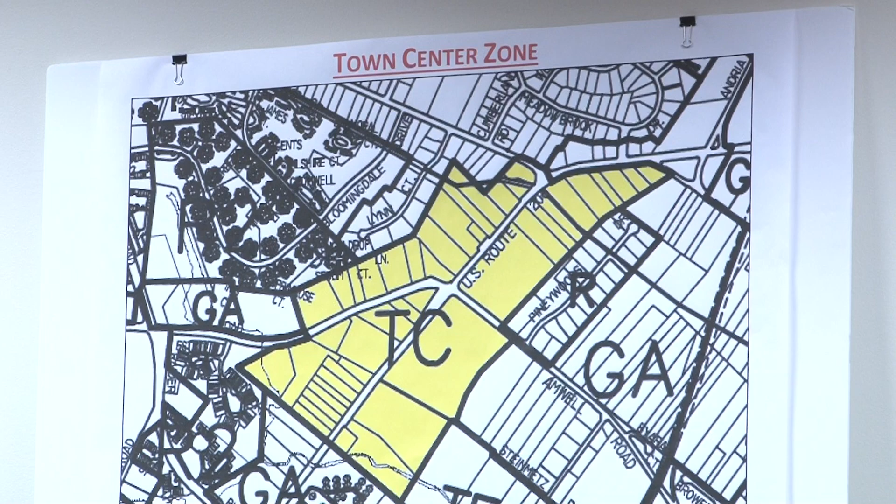Simply put, the ordinance would add single-use multifamily dwelling buildings to the permitted uses and conditional uses in the Town Center District. Apartments are permitted uses right now in the zone. This does not add a new use. It's just that they are only permitted on the upper floors of mixed-use buildings. This would allow them to be constructed as part of a mixed-use development, but in a single-use building.

So the thing to remember here is that you would not be getting an apartment complex type development with no retail. It would still have to be part of a mixed-use development. There's two main components to the ordinance. The first adds a single-use multifamily building as a permitted conditional use in existing shopping centers as defined in the Town Center District.

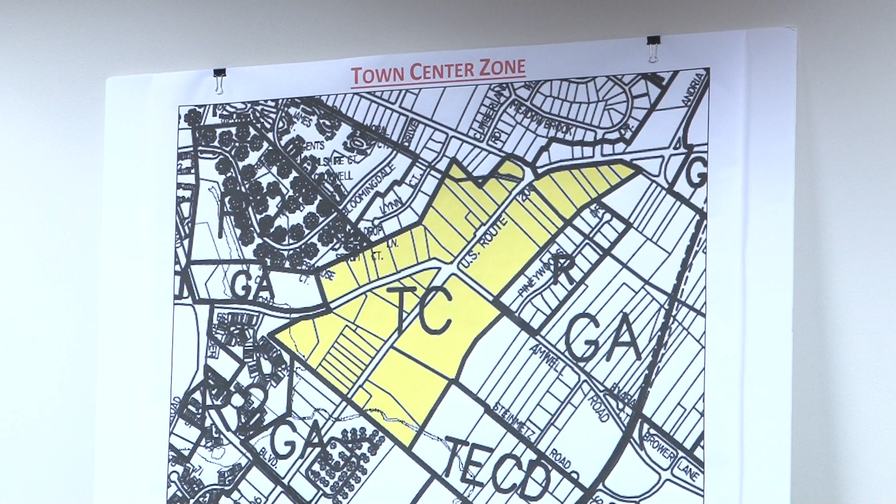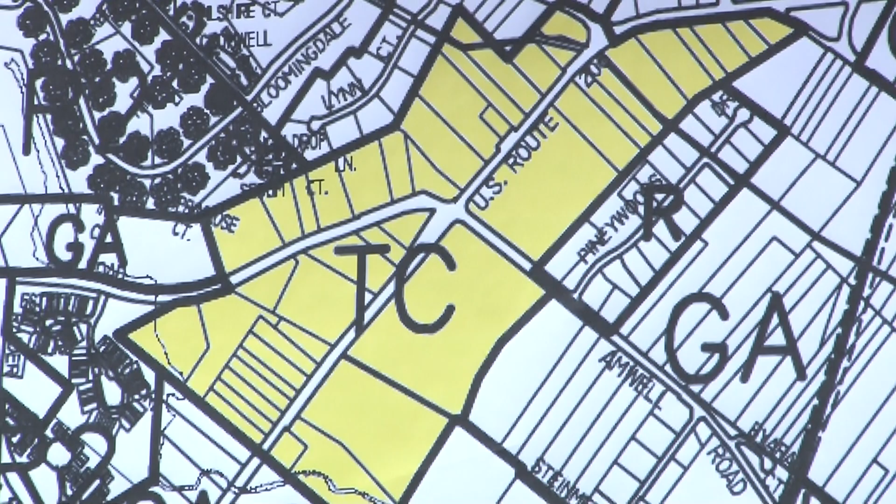They would apply to, in this case, the two existing shopping centers south of Amwell Road and east of 206. Pointing at Nelson's Corner, just below that is what was the former Stop and Shop shopping center. So in those two cases, a single-use multifamily building would be permitted, but you could not reduce the commercial space to anything less than 86,000 square feet.

So it still requires it to be a commercial district, or a commercial development. The second component creates a mixed-use inclusionary overlay district on 8 adjoining lots fronting on southbound Route 206, totaling 8.8 acres. It's these lots right here. This larger lot right next to the T, that's the Bottle King, for your orientation. And it's these lots to the south of the Bottle King, which would be

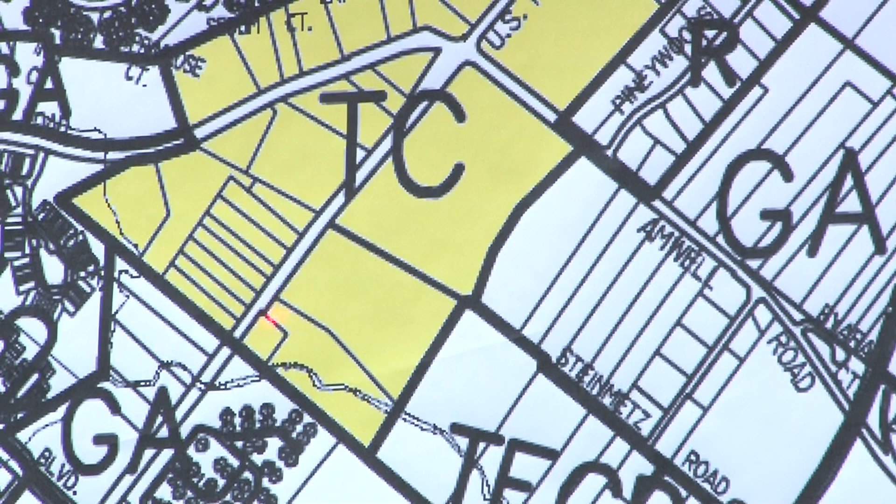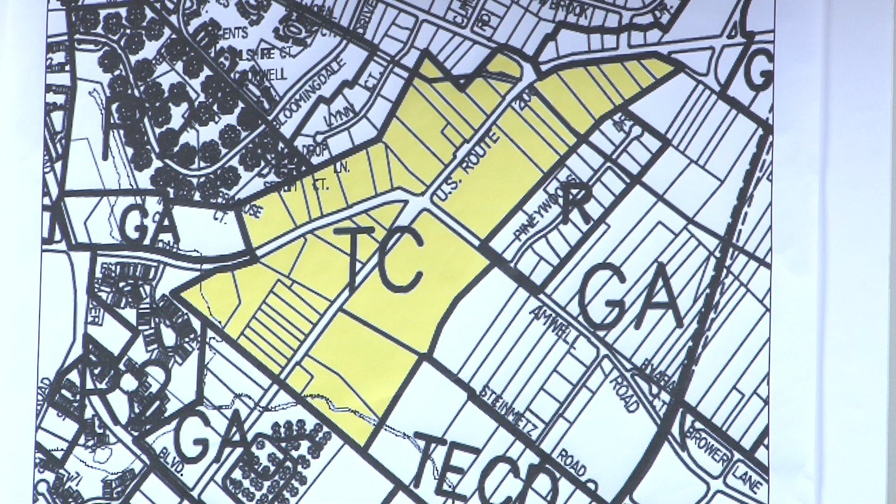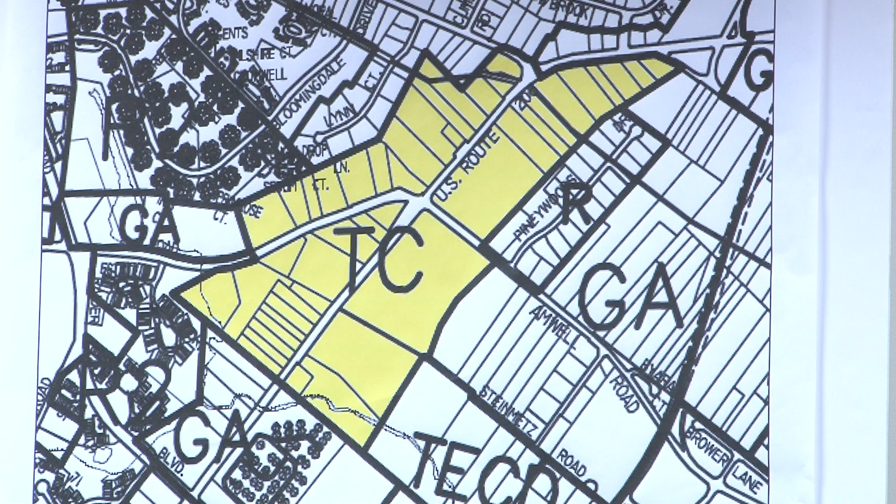combined into an 8.8 acre parcel. So that would become an overlay district, which again would allow single-use multifamily buildings, but only as part of a larger mixed-use development. So in terms of consistency with the master plan, and I'm referring to my memo that I've sent to the board dated April 25th, both, in my opinion at least, and it's up to the board whether or not they concur, are consistent with the stated purposes of both the Town Center Master Plan and the existing Town Center District Ordinance, which is a mixed-use, well-designed, compact, traditional neighborhood integrating land uses with close proximity to each other and providing for the daily recreational and shopping needs of township residents.

These amendments would not change either of those purposes.

As noted before, this ordinance does not add an otherwise prohibited use, in this case lofts or apartments, but rather allows a degree of flexibility in terms of how a permitted use is integrated into the site. All current town center design requirements would still apply. Of particular note, single-use residential buildings would be prohibited from fronting on Route 206, so we'd still be maintaining our main street wall in either of these developments. As a plus, in terms of the existing shopping centers, this would allow them to become mixed-use developments rather than single-use retail developments.

This is before the board tonight for your comments, for changes or no changes, modifications as you see fit, and whether or not you agree with the consistency to the master plan.

David, could you explain, is the maximum amount of units that could be built and/or the percentage? Yes, I did forget to mention that these are affordable housing units. It would be an affordable housing component to whatever development takes place under these amendments. In the overlay district, the maximum total dwelling units would be 191. The minimum affordable units of that total would be 46. The conditional use would allow a building up to 44 units total, a minimum of 11 of which would have to be affordable units. There's a minimum retail component to both as well. In the overlay district, the minimum retail square footage would be 28,000 square feet. In the shopping center, it would be a minimum of 86,000 square feet of retail.

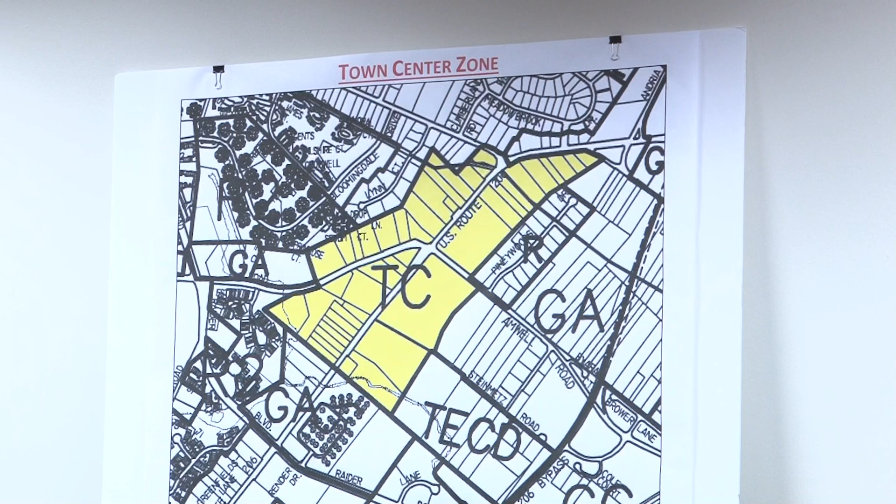Thank you. Any questions or comments? I remember years ago there was an architectural subcommittee, we started talking about it. Is there any consideration for any architectural type of designs? I know the town center was something we were working on years and years ago.

Yeah, these amendments do not change the current design requirements in the town center zone or the ASDO, the Architectural Site Development Overlay. So the architectural requirements you're talking about are still in place, they don't get changed. Okay.

Did you say that, like, the Stop and Shop shopping center, is the requirement for commercial property or square footage the same as exists today?

There'd be a minimum, for a property to qualify, they'd have to be at present no less than 90,000 square feet. As a result of adding a single-use multifamily building, they'd be allowed to reduce it somewhat, but no less than 86,000 square feet. So that's... still have to maintain much of it. In other words, we don't want it to become basically a residential development. They still have to be primarily a commercial development, that's not much of a reduction, so that sounds pretty good. It allows some modifications to some of the buildings.

Okay, thank you. Anyone else? Okay, we have a motion to open to public. So moved. Thank you, Stephanie. Second? Second. All in favor? Aye.

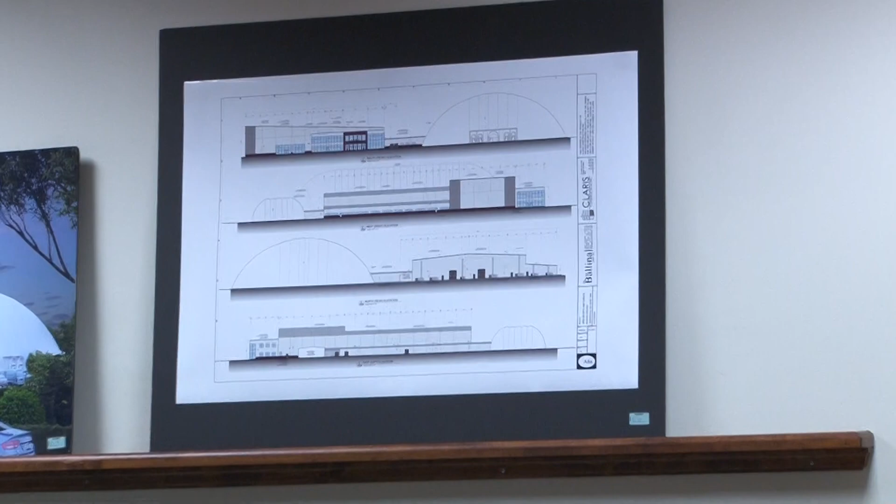Why don't you go ahead and describe the architecture? Thank you.

Again, we're a design-build firm, and we're partnering on this project with Fenton Construction out of Warren, New Jersey. We'll be the on-site general contractor. The project is basically... Could you just speak a bit louder? I'm sorry.

Thanks. So I'd like to speak tonight about the architecture of the project, and how it addresses your 2008 redevelopment plan, as well as Mr. Maskey's comments from his memorandum of March 15th, 2018.

Again, Exhibit A9 is an architectural rendering. A concern in your redevelopment documents is something called massing, and I'd like to start with that.

So building massing, really, in simplest form, this thing could be a simple box, and ideally, in a perfect world, everything fits nicely, and it's a very high, ugly box. And so our job as architects is obviously to meet your requirements, but also make this thing look fantastic.

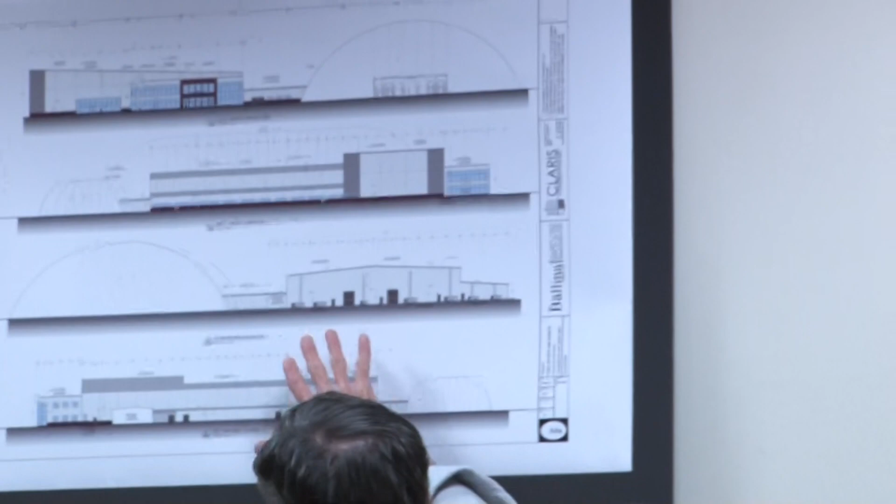One of the things we started with was, as you can see from these elevations, the west and the east elevations -- can you identify the exhibit, please? A10. Exhibit A10 shows the elevations. We've dropped the lines of the roof lines on the east and west elevations to create, back to Exhibit A9, a second level, a lower level roof.

That gives the impression of a smaller building. It also creates some nice horizontal lines, which is also in your regulations.

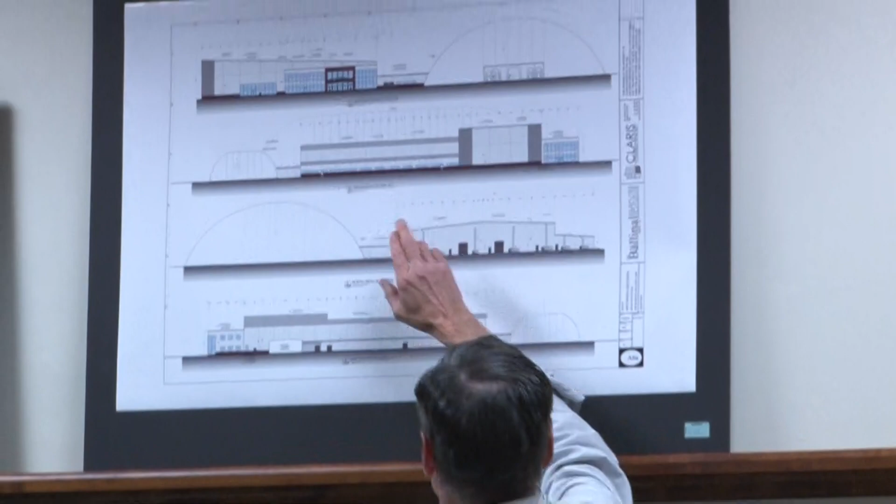We also took the basic box, which back to A10, Exhibit A10, is this area from here to here, and it's a gabled end, two-sided structure. So we said, what can we do to the front to make this thing pop?

Back to A9, Exhibit A9, we took a different mass, a different box with a single slope and put that onto the front of the structure, and it did two things. Functionally, it created a large high spot for us to have the climbing operation functions in this area. So it was functional, but also it took a plain vanilla two-sloped roof, following the same roof line, and extended it to give it a wow factor.

We also said, okay, we need to, for the entrance and the administration area, what can we do there? So we took a cube, which is, as you can see, is all glass. I'm still on Exhibit A9.

We pulled that out from the large structure at a lower plane, and with the glass, again, it serves a function as well, because this is administrative -- the main entrance, reception, conference rooms, etc. -- and that really requires glass in those areas for natural lighting. So it serves two functions.

It also, we change -- I'll talk about textures and materials in a minute -- but by having glass there, it kind of brings your eye towards that entrance. It's very important, and I'll explain that in a minute too.

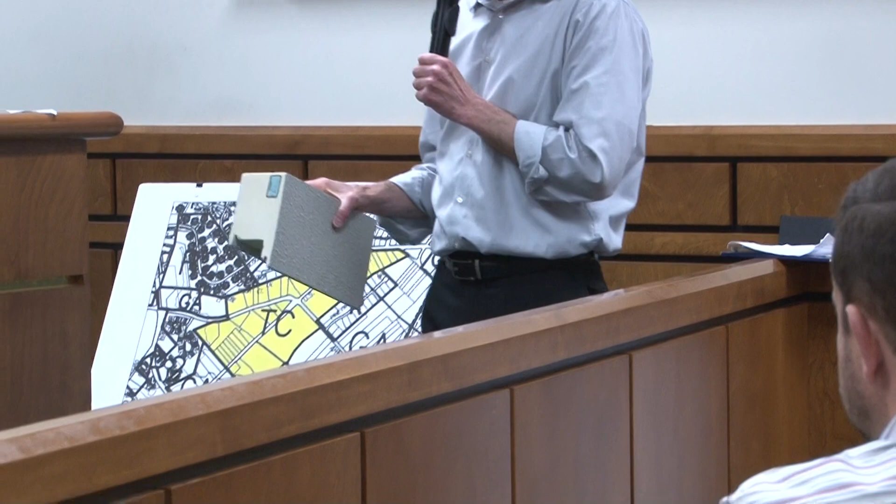And why we call it a sandwich panel is because on the inside we have a certain number of inches of foam insulation. The thickness is dependent on the energy code, and it could be anywhere from 2.5 to 4 inches. The outside has another metal panel for durability, but then we apply a stucco embossed face. We use this on other recreation facilities. It's absolutely beautiful, and it gets the job done that I need done, which is durability and aesthetics.

So this is the panel we're proposing for the two sides, the south and the west. I'm back to Exhibit A9. The south and the west. On the north, the east, those two sides are hidden by the bubbles, and we have the same panel with the metal on the inside, metal on the out, but we're not showing the stucco on the outside on the two hidden sides. They will be the same color, but it'll be a flatter, sleeker panel.

So we've talked about, back to A9, Exhibit A9, the panels. Then we go from a light gray to a dark gray at the higher point of the building. And we just feel that we needed to do something on these two corners to dress it up. These are also stucco, a different type of stucco.

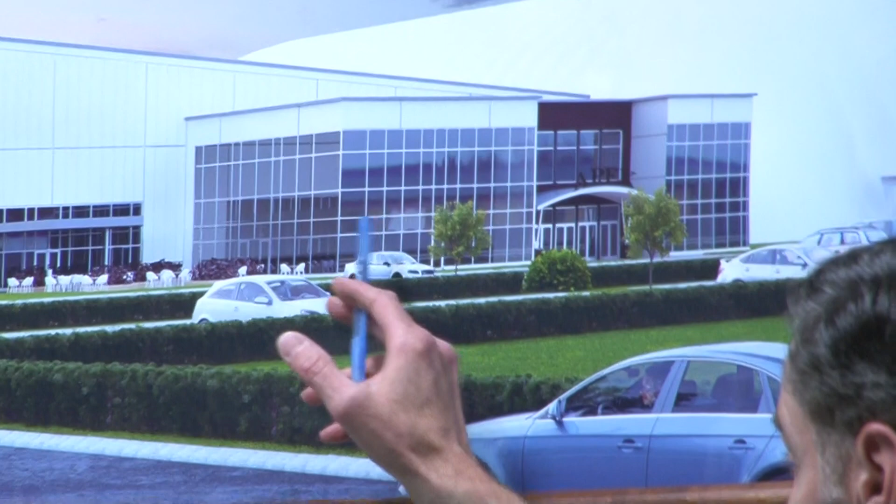And speaking of textures, then we go to the cube, the glass cube, and it's all just clear glass. We might go with a light gray reflectivity if we need to for the energy code, but we haven't run that yet, but we're proposing probably clear glass. Then we have the stainless steel, or aluminum, frames around the glass.

That's the products that we're proposing for the building, and we believe it nicely meets your redevelopment plan.

One statement in your redevelopment plan is they're emphatic that this does not look like what they're calling a Butler building, with corrugated, horizontal, ugly, like you see in a distribution center. And that's another reason we're suggesting this type of panel.

We're confident this in no way looks like a typical Butler building. It is a Butler structure, it has a pre-engineered, what we call Butler superstructure, the steel inside and the roof. But the facade, I would challenge anyone to tell me that they could tell that inside is a pre-engineered building. So, I wanted to bring that up.

The entry, which I touched on, we recess it, which is part of the regulations. And we also made a dark brick block, split face block, identical to what we're wrapping the building with. Why we did that was we're trying to announce that entrance, trying to say it's a large building, here's the main entrance. It's important for operations that they funnel everybody through that main entrance. So we want to make sure there's no doubt where that entrance is.

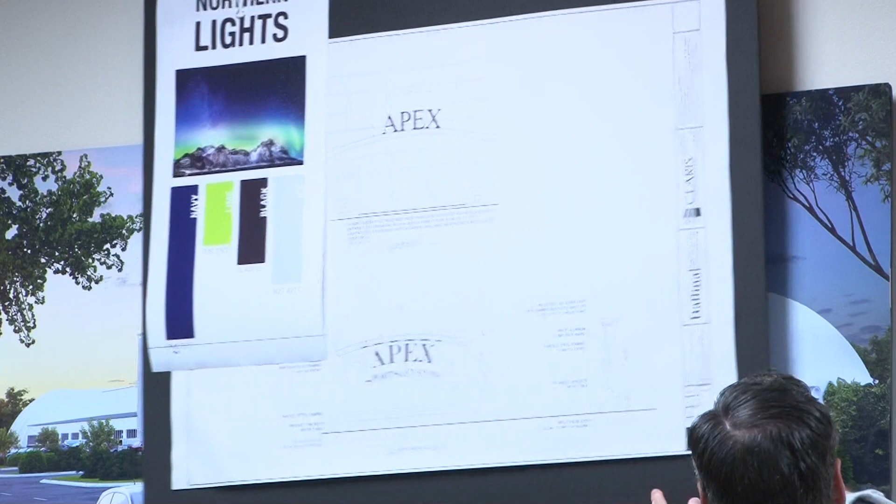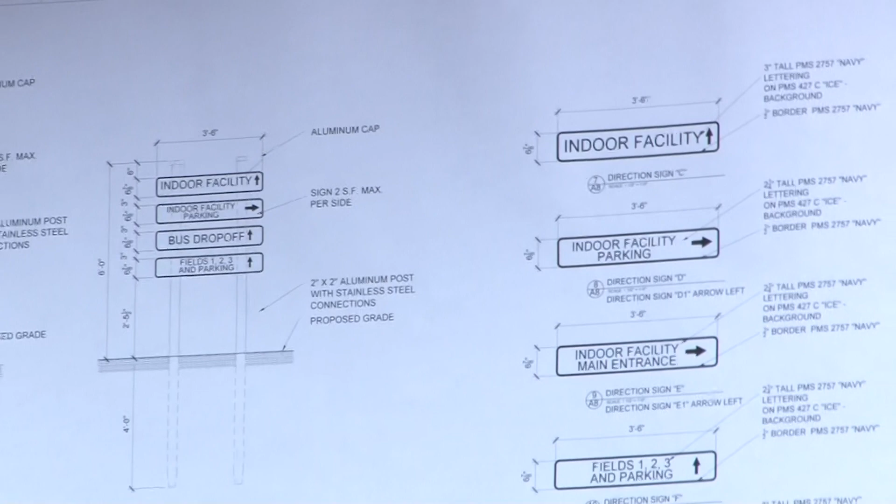So I have Exhibit A15 and A16, our signage package. Segueing from the main entrance sign, I'd like to go into detail about the signage we're proposing. When we initially submitted the package, we were over the allowed signage square footage of 40 square feet per sign, so we decreased all of those in our submission of April 23rd to comply with the regulations.

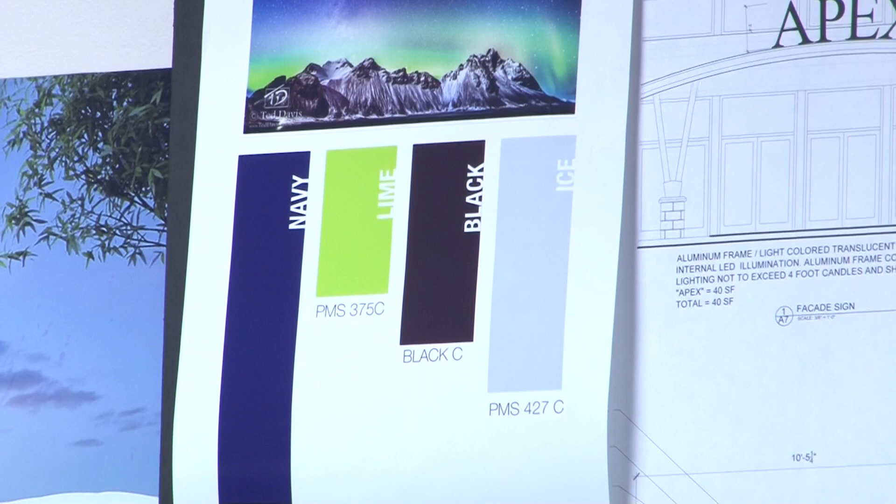The sign in front at the main entrance says Apex. It's tough to read, but it sits on top of the canopy. They are internally lit with LED lights, under the 4 foot-candle output required by your regulations. The palette the designers came up with is what they call their Northern Lights package, so navy blue is the color you'll see consistently throughout the presentation. It's the color of the letter faces. So these will be navy blue, internally lit, but they do sit on top of that canopy.

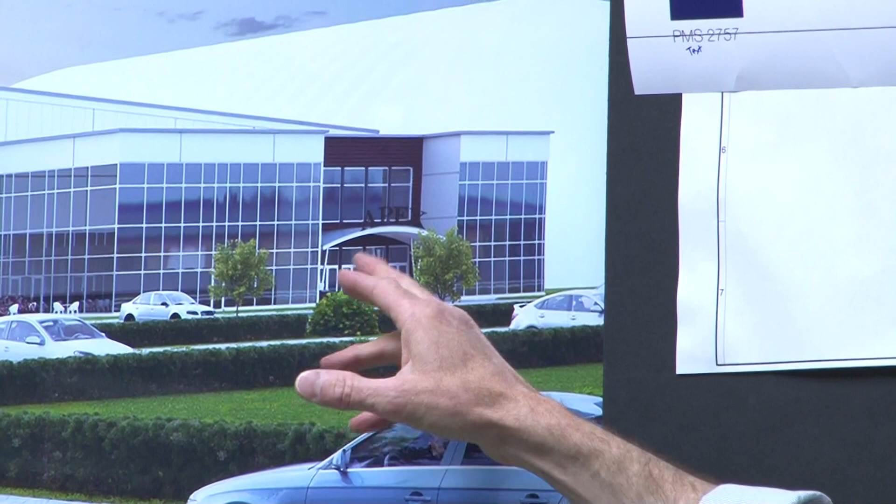Your regulations say they don't want to see signage on top of a canopy, parapet, or the top of a building. I think we meet the intent of that regulation, which is meant more to avoid a retail situation where signage sits on top of the building. These signs are 12 feet below the actual top of the parapet. They do sit on top of a canopy - we tried putting them below, had to raise the canopy, but it got in the way of the windows. It just didn't work. But we think we meet the intent, the spirit of what you were trying to accomplish with that regulation.

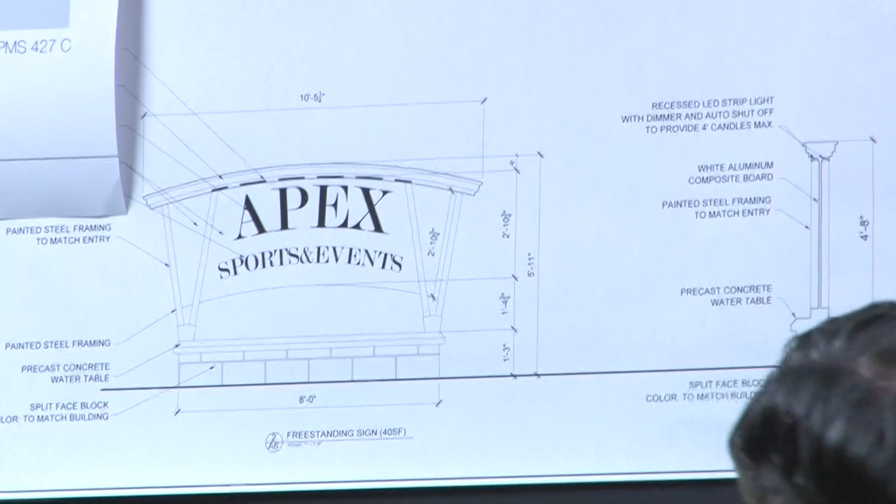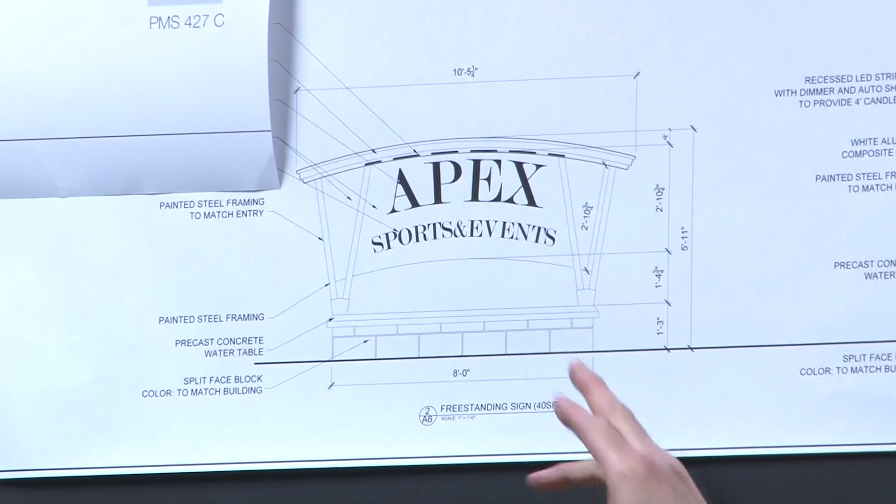Moving on to the main entrance of the facility, we're proposing A6, this type of signage. We're asking for a waiver to have 2 of these signs because we have 2 entrances to the facility. We're going to have a lot of people from the area coming for the first, second, third time, and we really want both entrances to have a sign saying, you made it, you're here.

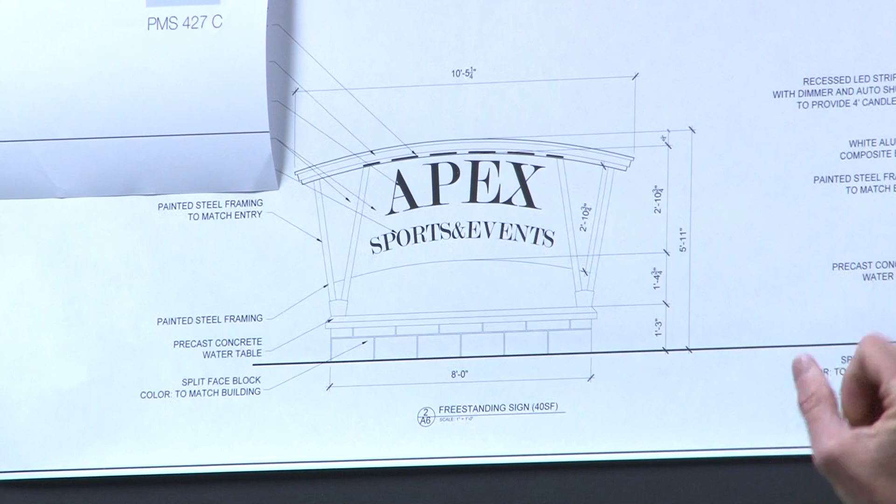So again, Apex Sports and Events, we've decreased this to the permitted 40 square foot surface area. It was larger in the first go-around. On the bottom we have a base of split-face block, color and block to match what we have at the building, to tie it in per your regulations.

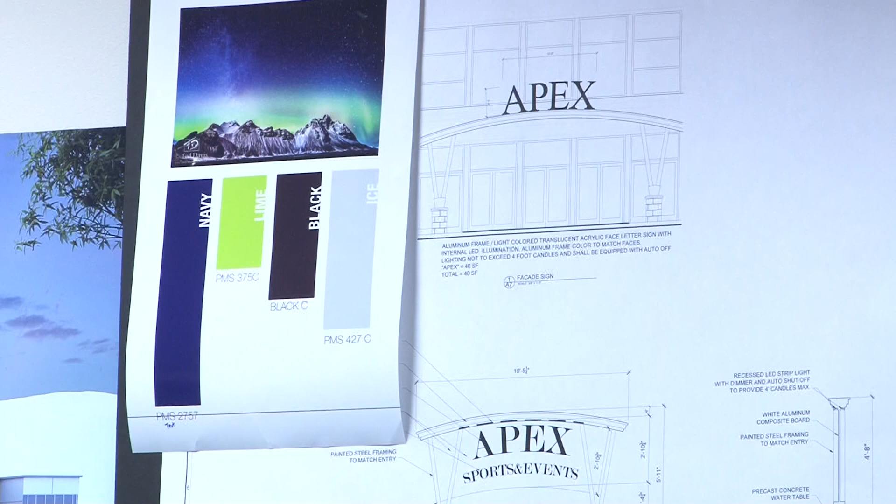And we'll provide landscaping around those signs to the satisfaction of the board's professionals? Yes, exactly.

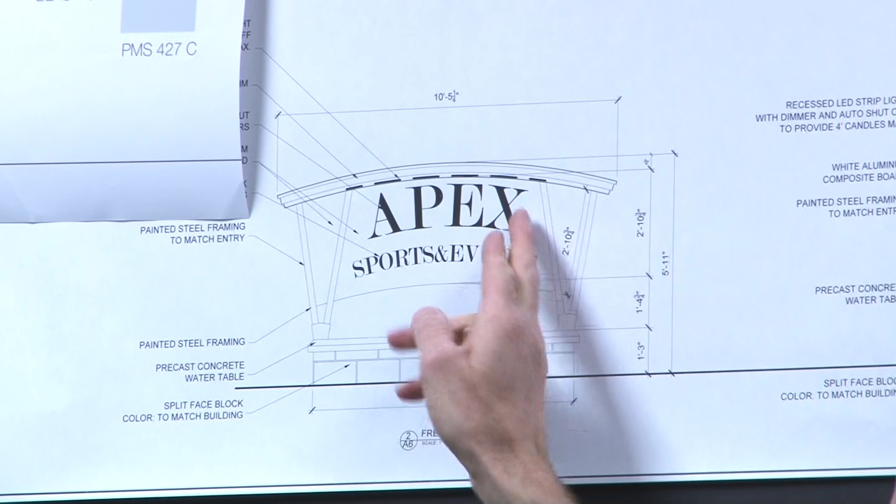So this sign has navy blue, it's a white aluminum composite board background. The top is an arch of AZEK trim, and embedded in it, recessed, are linear LED lights which shine down on the sign, below the 4-foot candle regulation. Again, we're asking for 2 of those.

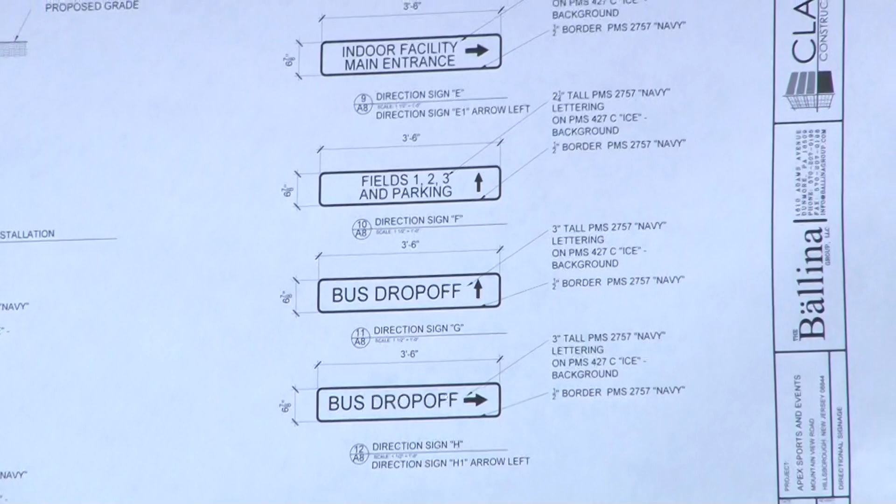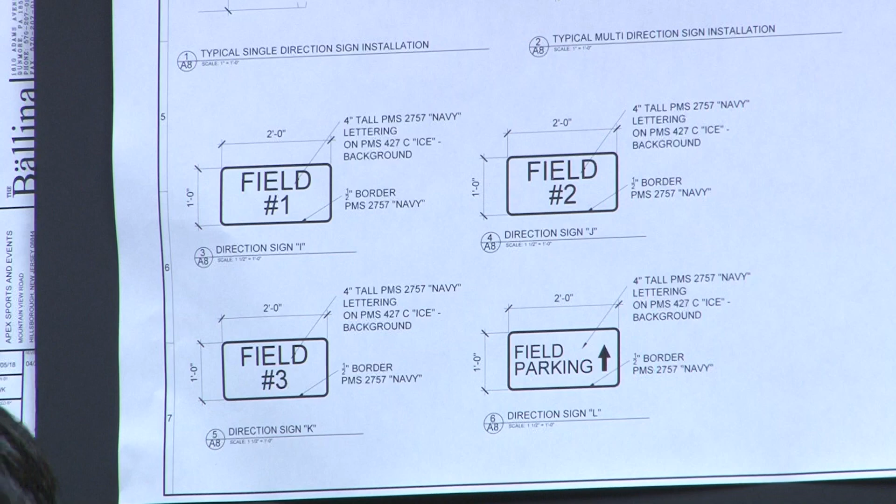And then we have Exhibit A16, which is our directional signage, on-site directional signage. Can you see it if I keep it over here? Yeah, so these, we believe, also meet the regulations. None of them are larger than 2 square feet surface area. Again, they match the same colors as our other signage, and there are no advertisements on the signs. They're purely for navigation, but we do need them. It's a large site with a lot of fields, so we request the signage as laid out here.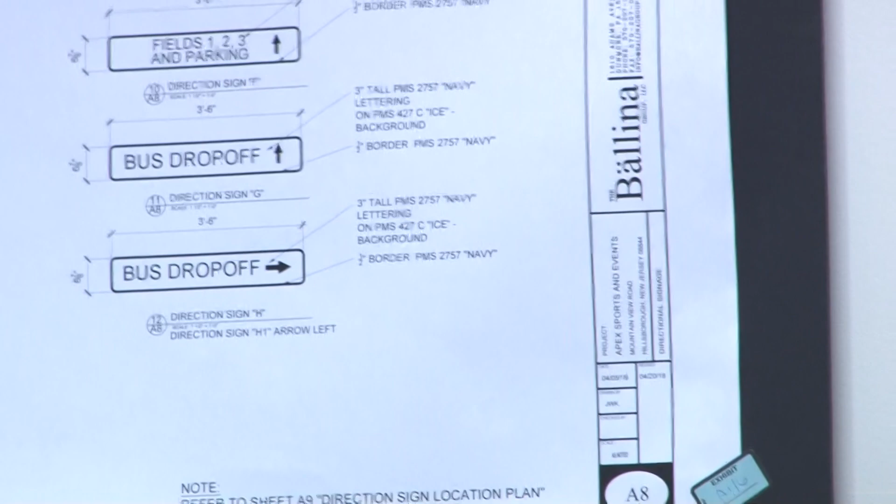Can you explain what the color ice is? Ice is, it's a word for light gray, I think.

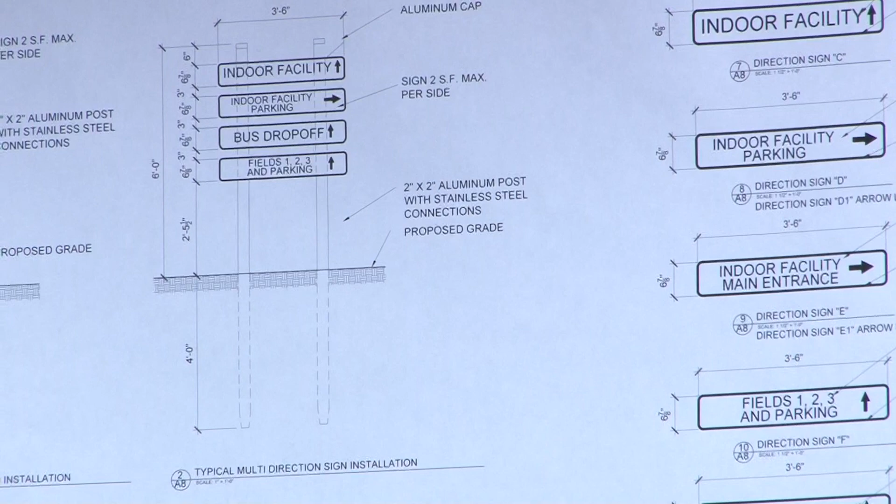Okay, so that's the signage. If I can revert back to the building, Mr. Maskey pointed out in his comments that we should confirm the heights of the building. There are 2 different types of heights: the overall height and the average height. The overall height, the highest point, is right here. That's not the domes; the domes are under a different category. The overall height is 48 feet 6 inches.

Your regulations allow 50 feet. The average height is taken by the very highest point, adding to it the lowest vertical roof line, then dividing by 2, and that's how you get the average height. You're allowed 40 feet high, and this comes in at 31 foot 6 inches high, so it's well below your regulation.

So we talked about height, signage, and building appearance. The last subject, found in a couple spots of your regulations, is the mechanical units, meaning heating and air conditioning units. We have 2 types: ground mounted and roof mounted.

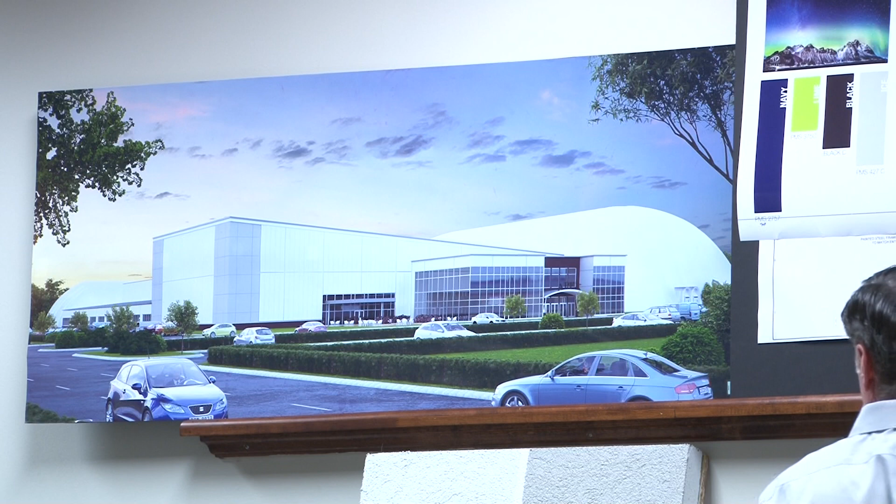The roof-mounted units are in the front 2 boxes of buildings. They heat and cool this glass dome and the large structure with the single roof, referring to Exhibit A9. The roof units, there are 9 units on the roof, and they're all a minimum of 22 feet back from the edge. We have a parapet, so they will never be visible by anyone, which is part of your regulations.

The other units are located... do you want to use one of the previous exhibits? That'd be great. Referring to exhibit A2, dated 4/5.

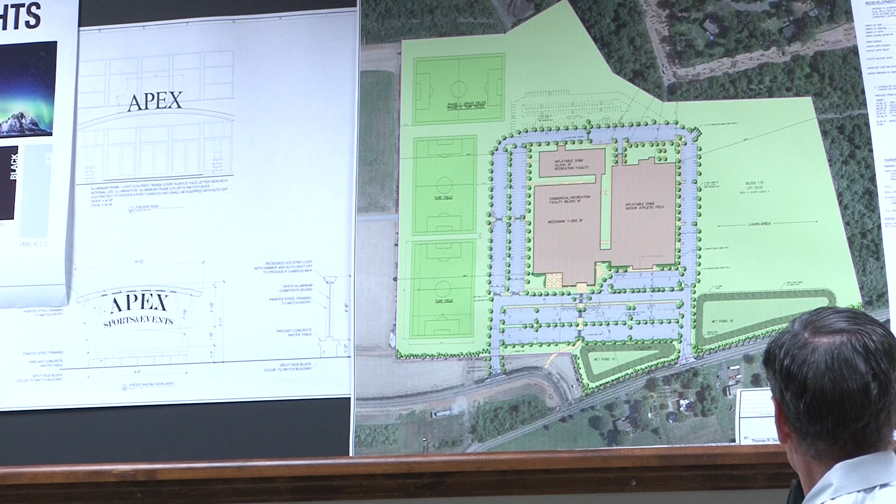So we talked about the units up front that are on the roof, hidden from view. The remaining 7 units are on the ground behind the main hard structure, between that and the smaller inflatable dome. Except for the very end one, I'm confident they're out of view, and I believe we'll have to screen that last one with solid vinyl screening. I don't know if it's just going north to south, or if we have to turn it; once we're building it we'll determine how much screening is needed on that particular unit, because it's probably 20, 25 feet off that corner.

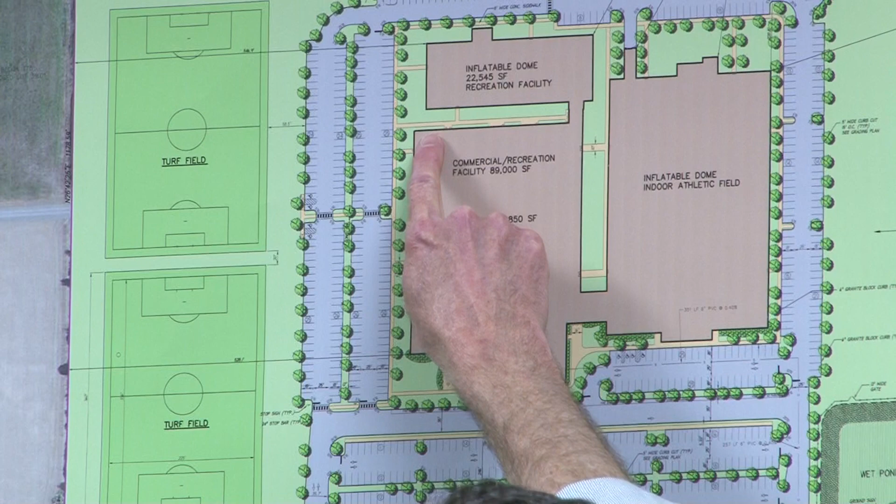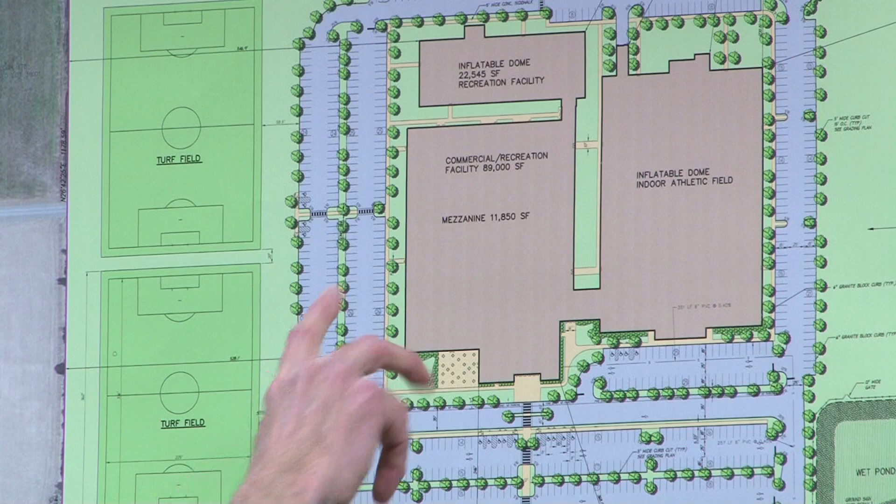The other units are for the domes themselves, and they are on the north side of both structures. They will also be screened from view, on the ground, and the screening will have acoustical lining. We did a study on the noise coming off these two units because they're the closest to the neighborhood, and they are well within the allowable decibels at the property line. Not even close, right? Not even close.

The local and state noise ordinances match, because the state requires municipalities to use the sample noise ordinance. They allow 65 decibels between 7 a.m. and 10 p.m. at the receiving residential property line, which is again well over 250 feet from these.

So if you want to say what you found at the property line of Apex - we only measured sound from our property line. The loudest one we could find was 46 decibels, and the next one was 31 decibels. Just to put it in context, 30 decibels is a whisper, 40 decibels is what you hear in a library, and 50 to 65 decibels is a normal conversation.

But at the nearest receiving residential property line, pursuant to both your ordinance and the state noise code, it is 50 decibels from 10 p.m. to 7 a.m., and then 65 decibels in the other hours. Okay, just so they could hear in the back.

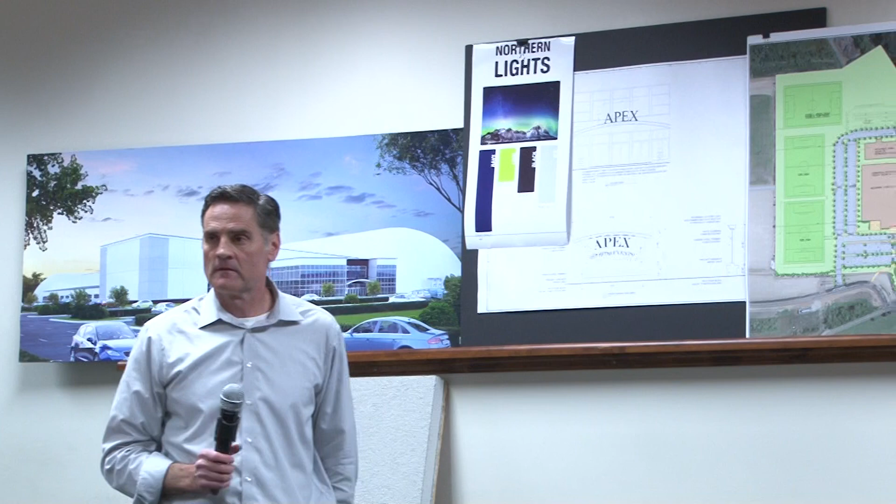You made mention that there was going to be a backup standby generator. How big, and is that going to be located next to the air handling units? Yes, there'll be the smaller size. I didn't size it, but probably 75 kW.

And they're not for noise, you're asking maybe? Yeah, basically. So they're exempt, I believe, from the code. But I will say they only come on once a week for 10 minutes just to run them, and that's automatic - you can choose Tuesday at 10 o'clock. The only time they really come on is when there's an emergency, and then there's bigger things to worry about than that noise.

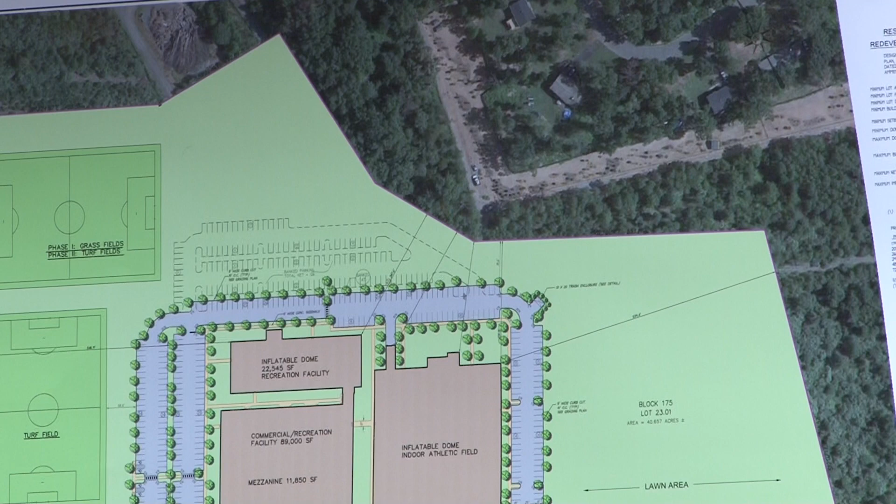So it's actually shown in red on Exhibit A7. If you could just hold it up. It goes along the northern property line. Okay, what type of fence is it? It will be a solid vinyl fence. Color? I believe one of the conditions was that we provide the color to the board's professional satisfaction. Not quite, reasonable satisfaction.

Okay, so if the board decides to go forward, there are no variances involved with this application. However, there are a few design waivers. One is for the size of the parking spaces and the width of the aisles. Another is a submission waiver, waiving the community impact statement. There is one sign waiver, to permit 2 freestanding signs instead of 1. There's an economic hardship waiver on the tree mitigation. They're allowed to cap it at 1.5% of the total site improvement costs, which is what they're requesting. It results in the replacement of 557 trees and a contribution to the Township's tree fund for an additional 8 trees. So that's another waiver.

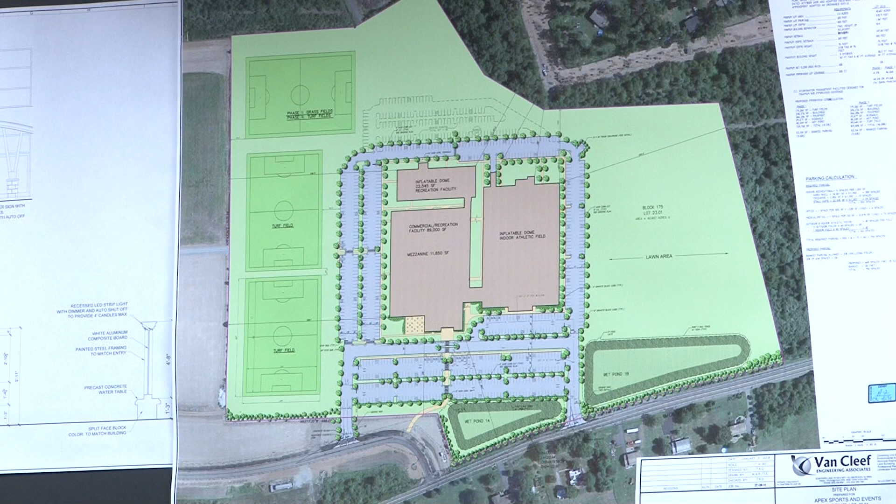We talked to David about the fence inspection around the LSRP area that was being inspected semi-annually. Is that done by the LSRP, the township, or both? That's arranged by the owner of the property, as part of their engineering controls from the DEP.

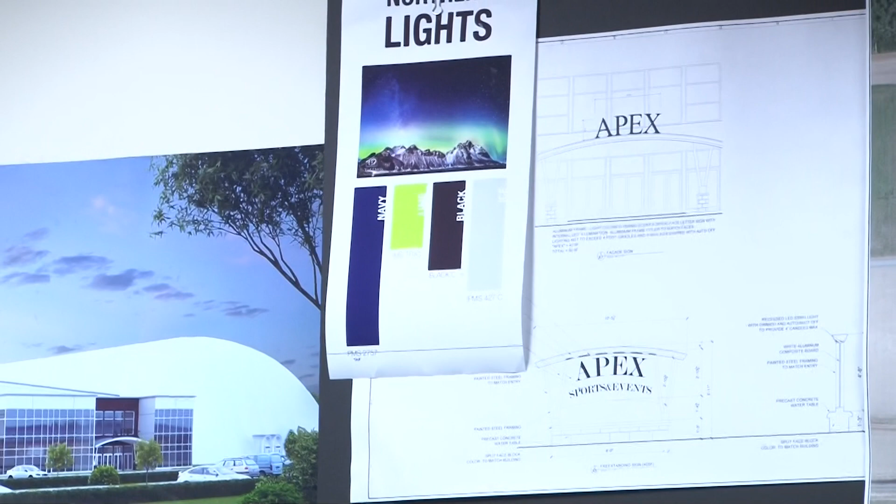We're maintaining the hours of operation from 8 to 11, Monday to Sunday, 7 days a week. The lights, we've discussed, would be turned off when they're not using the last field as a priority - that was testified they would comply with. The southernmost two fields would be priority, and the last one would be third in line. Just to clarify the hours, outdoor.

Outdoor 8 to 11. Indoor, the standard hours should be 8 to 11, but we would hope the board would allow other community events during other hours.

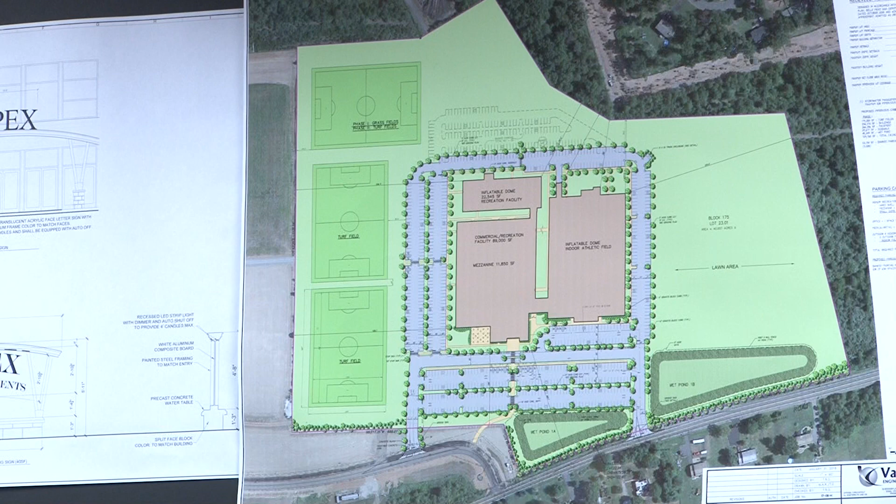Anything else from anyone? You just have DRCC, all the other approvals as they come in. Correct, we have most of them already, but yes. LOIs, and it's preliminary and final major site plan that we're seeking. Okay, that's it, thanks.

I'll just say thank you to you and Mr. Wilkie and his team for being very understanding and giving the public every chance to make their concerns noted, and for attempting to be a good neighbor, which I think he's demonstrated. He's here to be a good neighbor, and the project is in his field, and it is beneficial to all - he wants everyone to enjoy it, and is willing to keep everybody's intentions within reason. It's obviously within the parameters and zoning to have this here, but he still was, I felt, able and willing to listen and meet with people publicly and privately. So I thank Mr. Wilkie and his team for doing that.

At this time, I would enter a motion for approval as stated with the conditions that were stated earlier. I'll make that motion. Thank you, Mr. Scoba. We have a second? I'll second. And a roll call, please.